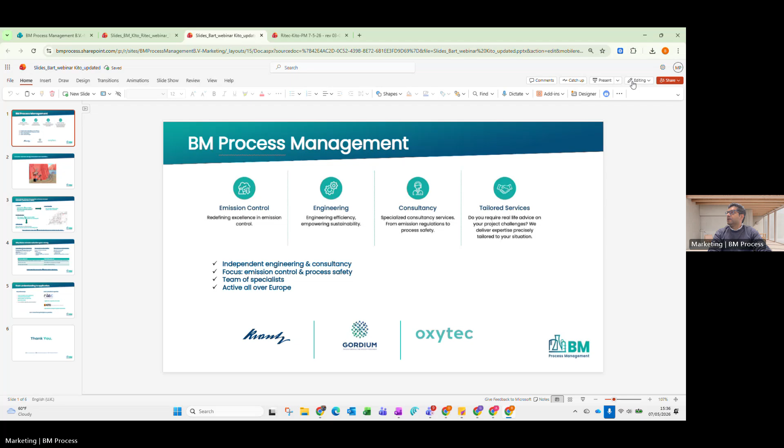Okay, thank you. Hi there, I'm Bart. Good afternoon, everyone, and thank you for joining. I'm happy to see the answers in the first quiz, that's actually good news, I think. For those of you who don't know us yet, we are an expert group. We handle general process, but we have a strong emphasis on off-gas treatment and the handling of explosive gases, and we are active throughout the entire EU.

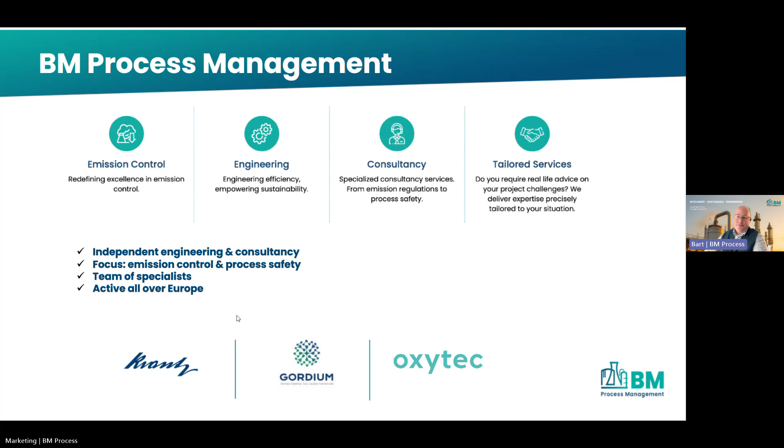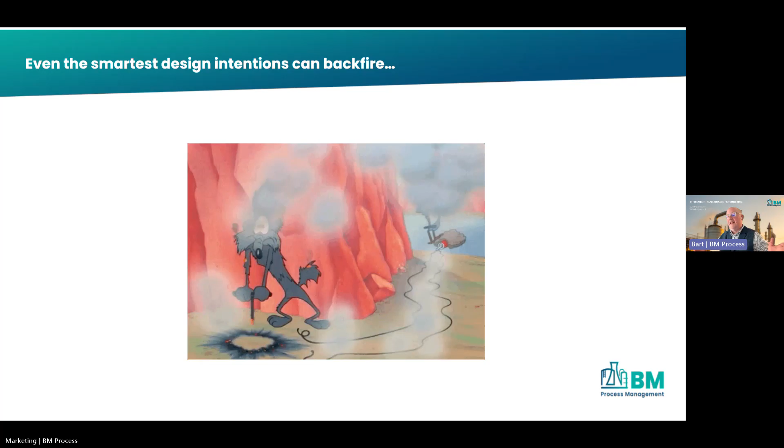So I'm pretty sure that you all know this guy. When I was a small kid, I really loved this, and to be honest, I still do. He always makes very smart plans, but in real life, it doesn't turn out as he expected. And that's the same in actual process design, because in real life, it can often lead to real life events that don't go as you planned or designed for.

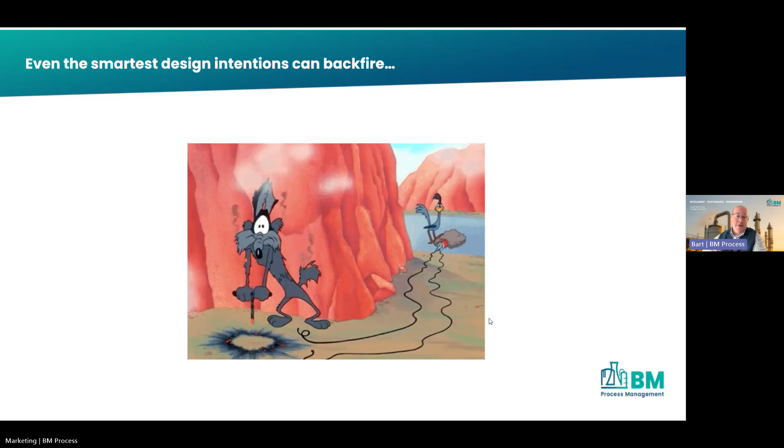So that's why I would like to start with an example from our day-to-day work that shows how we hopefully prevented such a thing from happening.

So let's go back to 2025, a client in Rotterdam. You see here 4 key steps that I wrote down. This client wanted to store a new product. Previously, the products he stored were in gas group 2A, and the new product fell into gas group 2B3. That required a complete review of the whole explosion protection and therefore, of course, also of the flame arrestors. By the way, previously they used inline flame arrestors underneath the breather valves, which in itself is not exactly optimal because there you can't really see what's happening.

You don't know if they're blocked. Problematic. But also, we changed the whole tank protection because we also moved into a plant where we would actively extract the off gas. So that actually required that we also review all of the breather valves, the pressures, and this and that. So based on that, we plan to install a breather valve for the day-to-day breathing, not for the overpressure protection, because the outlet of the off-gas was handled by the off-gas treatment. And of course, we also need to breathe in air when you need to.

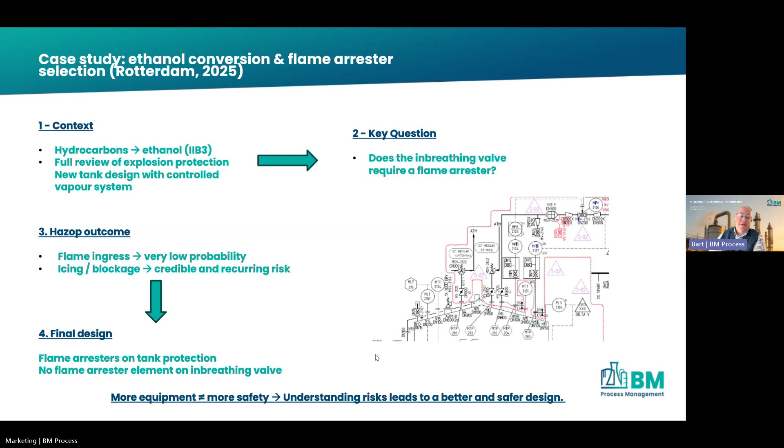So why does this go wrong? I split it up into three main groups. First of all, we see that we tend to properly assume and not go actually in depth. The other point is that we look at equipment, but not at the whole process. And the last one, I think that is even more happening in real life.

Is that we all, at least me myself, are pretty much risk averse. So we want to ensure that we avoid risk, where it might be smarter to see, okay, but what would be the right idea to do here? Because we always want to go for more is also more safe. But there you could ignore, for example, pressure drop, the fact that it can freeze over.

And what we also, at least me, see very often in practice is that flame arrestors have been placed, but you can't reach the bloody thing if you want to have work done on it. So there's also a part on where do I actually place it so I can do what is actually needed. So if you have a clear view of the whole process, that will lead to the fact that you do better in the entire process design.

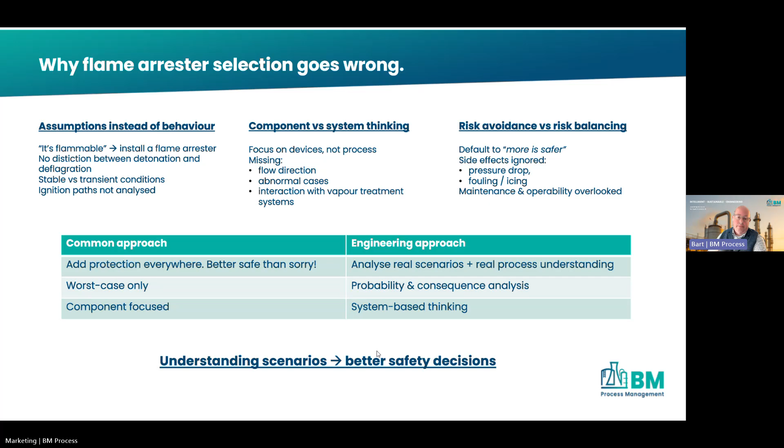So that brings me to what is the goal of today. We talked about three parts, and I added one more: use actual expertise when you really need it. We have a lot of it, me and my team, but if we don't know, we call the experts. That's why I'm happy with the guests we have today, because in past projects they've really helped us out. And in the end, that is the goal: we want to help the client.

That's why I would like to go into a deep dive on how to do all of this in practice and how this equipment actually works. So I will talk to you again in the Q&A at the end, and Amol, back to you.

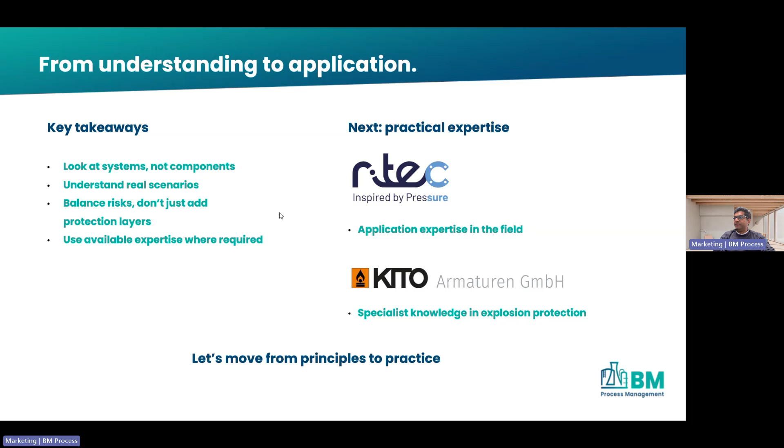Thank you, Bart. Good intro and sharing some practical and real life examples. As you said, let's move from principle to practice. So in a couple of seconds, I would like to get our...

Oops, sometimes it's a different story. Okay, let me see, present.

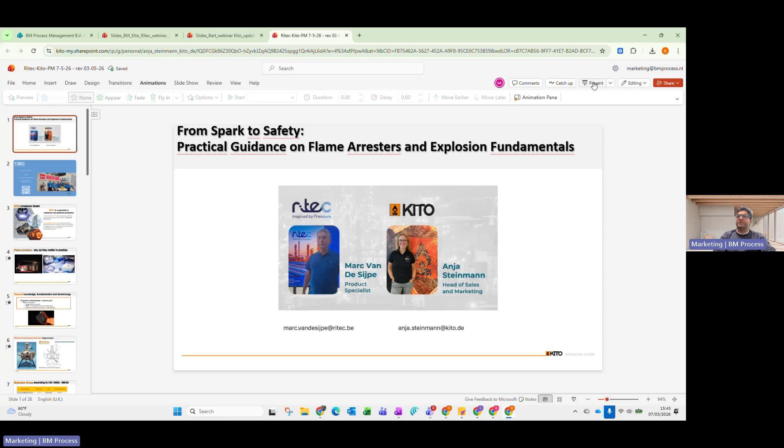All right, so I would like to invite on the screen our two guests and experts with whom BM Process Management has worked successfully. So, Anja and Marc, welcome.

Thank you. Welcome, and thank you for your introduction, Amel and Bart. We are happy to be here. Over to you. Okay.

Hello, I am Marc Van de Sijpe from the company Ritec. We are near Ghent in Belgium, and our CEO Rick van der Bussen started the company in 1996, so we are existing 30 years. I'm almost 25 years at Ritec. We started with rupture discs of BS&B, which you can see here, still our biggest supplier.

But 10 years ago, we started to distribute KITO GmbH in Belgium and Luxembourg, so I'm very pleased with the collaboration. And then finally, when our colleagues in the Netherlands in Emmeloord stopped their business, the company Truevals, now for 1 year we are also distributing KITO in the Netherlands.

Over to you, Anja. Thank you. My name is Anja. I'm at KITO now for about 15 years, but worked before at another company also producing flame arresters, so I'm in this field quite a long time. KITO is a mid-sized company based in Braunschweig, in the north of Germany.

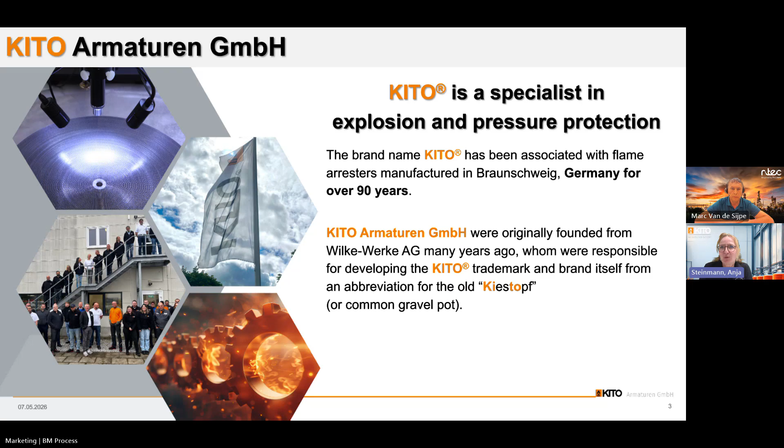So nowadays, Bart already mentioned why to install a flame arrestor or a breather valve, and we would like to show you some examples on the next slide explaining where to use them.

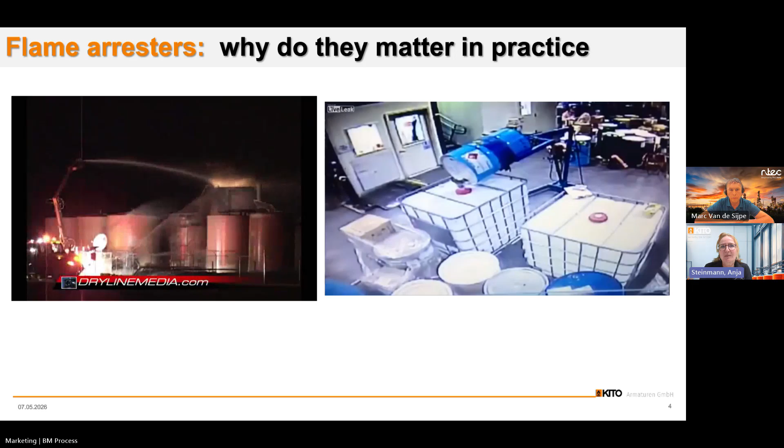So if we start with the left movie, we see that already a severe incident is happening. One tank is already affected, and although the fire brigade is doing the best, the tanks nearby are also affected, and everybody can see what happens if something is happening to one tank, and it is not a standalone installation.

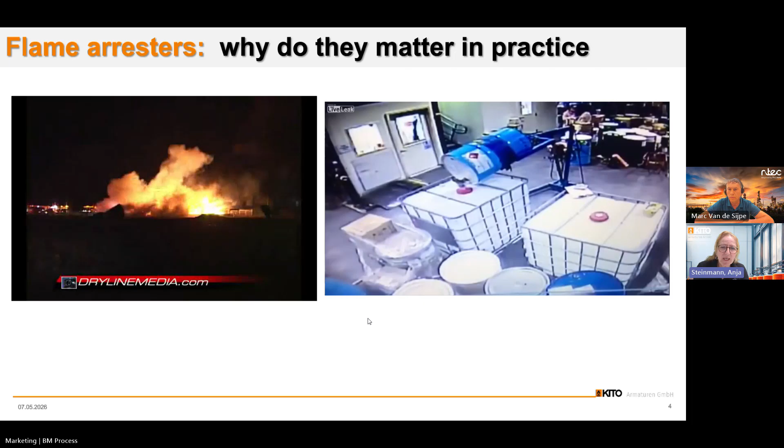So it will be very clear that that is severe. On the right movie, we have a completely different source of ignition. You see a man coming, wiping with a tissue, and he's creating a spark due to electrostatic electricity, and that can already be enough to ignite the atmosphere around the tank. So just two short examples of what can happen even if it's not very clear that there is a risk.

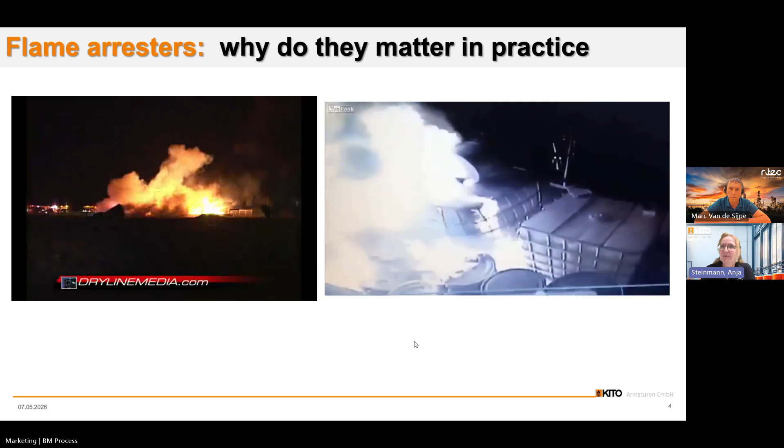So we would like to give you some more information about the world of explosion protection by flame arresters. Anja, when we have to deal with an explosive atmosphere and we as an owner cannot avoid that atmosphere, what shall we do? That's a very good question. Of course, the first aim is to avoid the explosive atmosphere, as Marc said.

We always need three things: a flammable product, an ignition source, and oxygen. If we can be sure that one of these elements is missing, we are on the safe side. But often that's not the case in reality, sometimes even only in startup or shutdown processes. So when we need a flame arrestor, that's a big field, so what do we need to know?

There are different designs of flame arresters, end of line, inline, so we need to know the application. And we want to have a deeper look at this famous MESG, maximum experimental safe gap, because that gives us an idea how dangerous the product is.

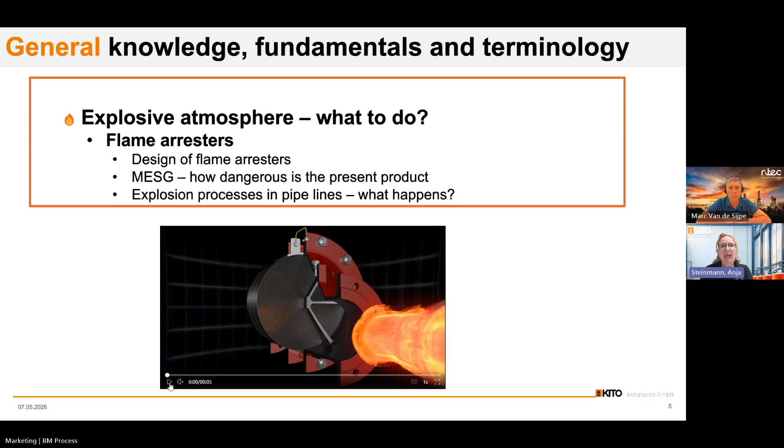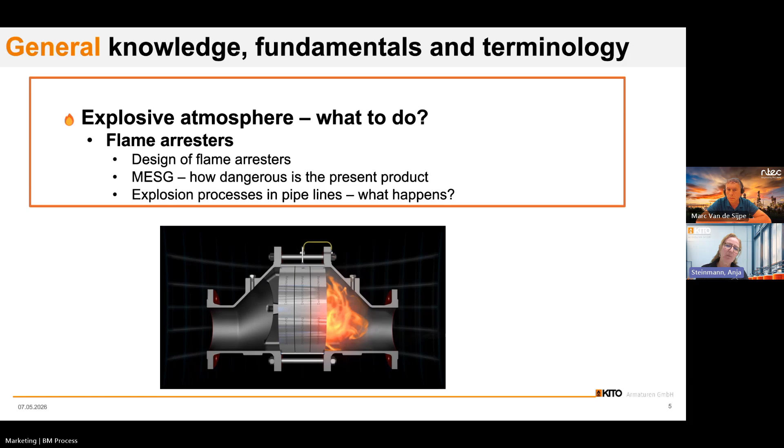As shown on the video below, thank you for starting that, Amol, we see how the flame arrestor in pipes is working. We see the flow coming from the side. Maybe we can see it again. And in the flame arrestor element itself, the flame is quenched. So a flame arrestor stops the propagation of an explosion from one part of the installation to another part.

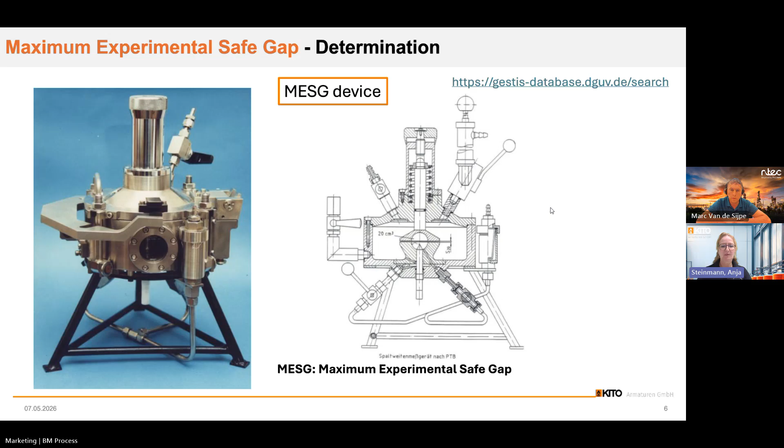So important to know: MESG, maximum experimental safe gap, is a very important parameter for a flammable product. Next slide, please.

Here you see the groups. The governing organizations have divided the various gases into groups from 2A1, the least dangerous gases, burning slowly like methane or biogas, up to 2C, which are violently burning gases like hydrogen. That's because it makes no sense to design a flame arrestor for each gas. It would be unworkable. So by dividing into groups, manufacturers can create a flame arrestor, for instance, suitable for 2B3.

This flame arrestor will stop all the gases from 2B3 and the underlying groups from 2A1 up to 2B3. There aren't so many gases in groups 2B and 2C, so if you are designing a multi-purpose tank for a tank farm, it could save money and pressure drop if you select, for instance, 2B3, because it will cover more than 90% of the gases.

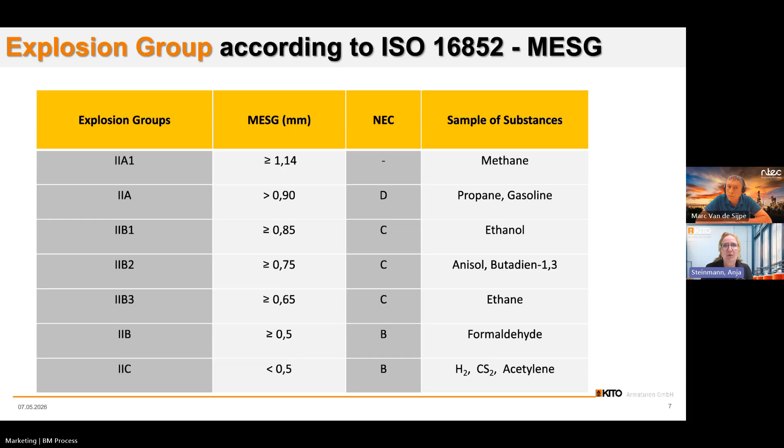And maybe just as an amendment, here we talk about these subgroups of group 2B, and those familiar with the electrical world know it's not quite the same there. In the electrical world, you see explosion group 2B and then a temperature class T. We sometimes see this in the data sheets we receive, but the electrical way of defining explosion groups is completely different than for flame arresters. So please, if you see something with T, that is not referring to the product in terms of explosion groups.

Next slide, please. I just want to invite you to have your own flame arrestor. If you can scan the QR code, you will get a grid. We can also share the link later in case you cannot do that with your mobile phone.

On the photo, you see the typical design of a flame arrestor element. We have this grid, the so-called crimped ribbon type. A flat ribbon and a crimped ribbon are wound together, and depending on the tooth wheel on the machine, we can create the specific width of gap, which is most important.

Here I want to point out that it is really important not to mix up the MESG, which we have heard before, and the width of gap, which is in the device. The MESG is measured under laboratory conditions, so we have a determined length of the gap, which can be completely different at the flame arrestor element of a device. Additionally, a flame arrestor can be used for different explosion processes, and therefore a different design of the flame arrestor element is necessary. So do not mix it up saying, oh, I have a 2B3 product, so automatically my width of gap needs to have the same value. That is not the case.

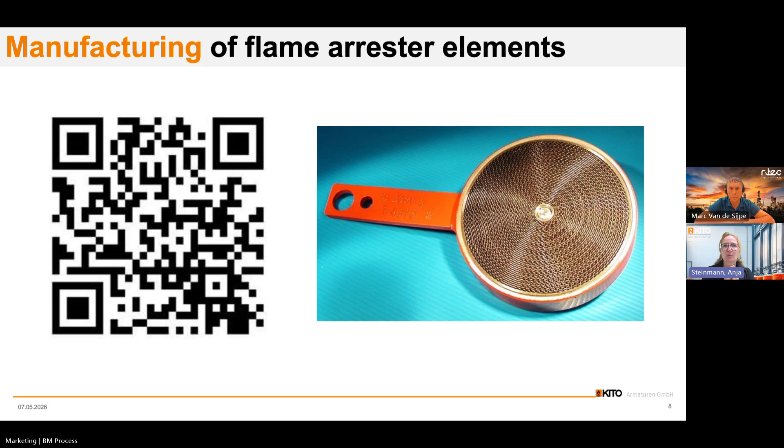For you it is important what is on the tag plate, what is on the certificate, on the declaration of conformity, for which explosion process and for which explosion group the flame arrestor is approved.

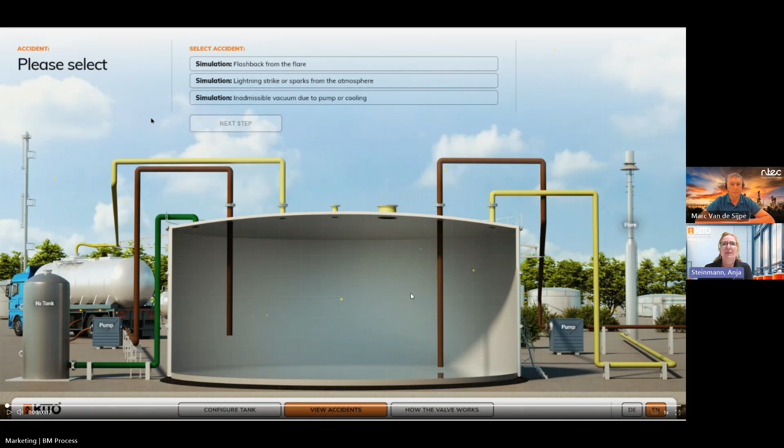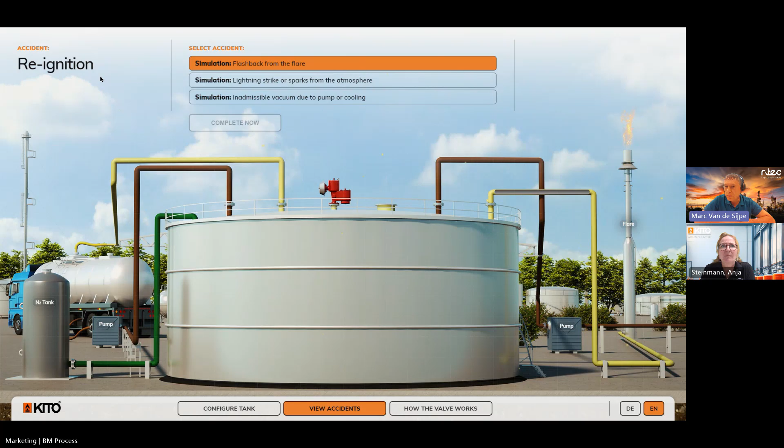Okay, so Marc, what are the risks? Here we see a thunderstorm approaching, and we will put a breather valve on top of the tank, but a valve without integrated flame arrestors. If you're lucky, the lightning will not pass, but if the valve is inbreathing or outbreathing... oh no, that was a flare system.

I think we need to go back one slide, huh? Yeah, thank you. No, one slide before. Okay. Yeah, and now start. Yeah, that's the flare, but no matter. You see the yellow pipe to the flare? It's correct, continue.

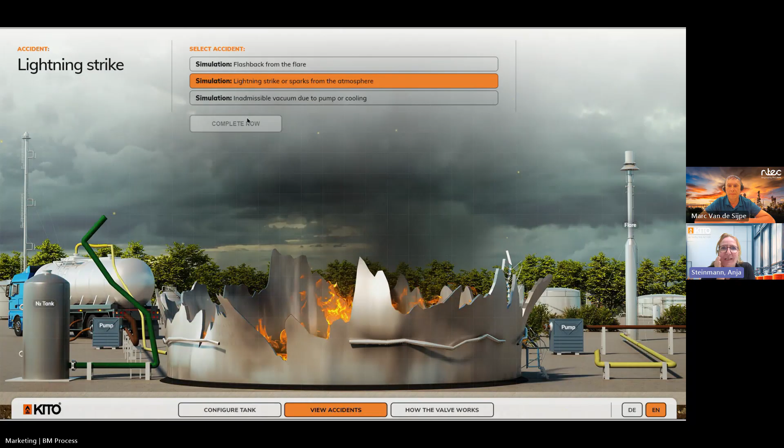Here is the lightning strike. Here is the valve, no flame arrestor. You're not lucky because it passes through. That is a bit what Bart had in the beginning. So if your tank is not protected, then it's a sunny day and in the evening it's getting cold, lightning from the thunderstorm, we will all not be happy. Okay, so now comes... no, that is again, that is the same.

Yeah, the lightning. So then next. Here we have the flashback from the flare. The yellow pipe is driving the gases through the flare, but the flare is burning continuously, so that's more dangerous than a lightning strike. And if you do not have a flame arrestor there, you can have a flashback from the flare and an ignition in the tank, which you see here.

Okay, so that was a very good example for an explosion process in a pipeline, which will bring us to the next slide, please.

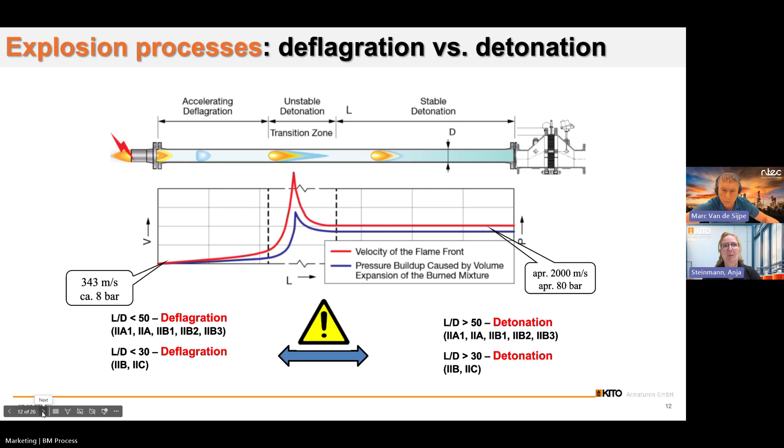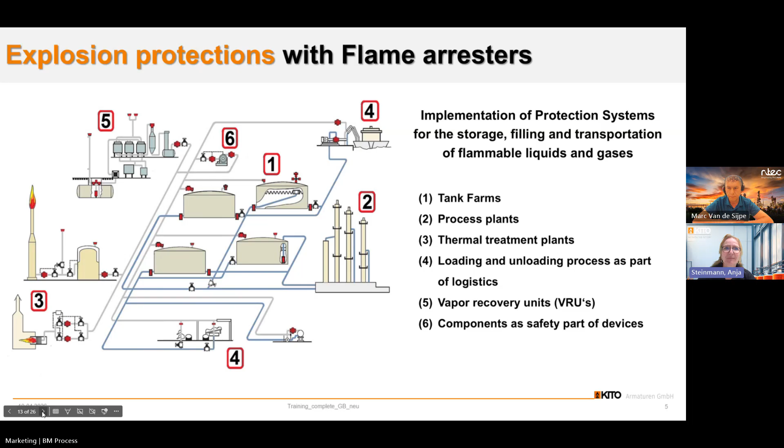Yeah, so in summary, Anja, which are actually the parameters that you really need to consider for a design of a flame arrestor? Yeah, that is the most important question. What do we need to know to give you the best possible support? Of course, we need to know which product are we speaking about.

Bart said in the beginning there was a change in product in the tank. That makes a big difference in the flame arrestors you may need in case the explosion group is changing. So first we need to know which product, then what is the explosion process which may occur - does it come from the atmosphere or does it come from a pipeline, as we learned before, deflagration or detonation?

Of course, the flame arrestor needs to be designed for the operational conditions, meaning it must be resistant against corrosion, temperature, and special specifications need to be considered, and temperature and pressures need to be double checked. Flame arresters are in general approved for atmospheric conditions. They are defined up to 60 degrees Celsius and 1.1 bar absolute. But there are as well devices which are approved for higher pressures and temperatures, but that must be known.

And of course, for the operator, it's very important, especially for inline arresters, that the pressure drop they are causing is not too high, to let the system run best.

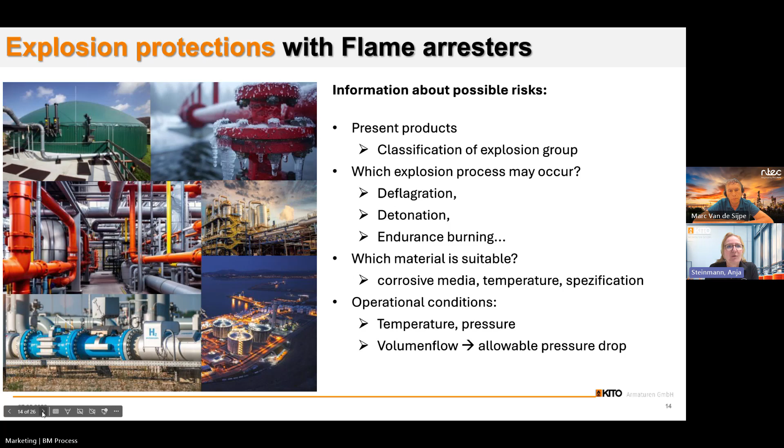All right, then we come to the next slide, and it's quiz time again.

Okay, I think that is hopefully now an easy question. What's the difference between deflagration and detonation? A deflagration propagates slower than the speed of sound, a detonation faster. A deflagration occurs only underwater, a detonation only in air. A deflagration requires no fuel, a detonation does. So please, your votes.

Okay, yeah, of course, what we have learned - both are explosion processes in pipes, and a detonation has higher pressures and higher velocities. All right, and we go to the next slide.

Yeah, we want to point out one document which can be really interesting - it's the CEN guide, a guideline for flame arresters. So it is not really a law, but it gives really helpful information such as definitions and as well installation limits. Marc, what we are facing often is this question about nominal pipe sizes connected to flame arresters.

Yes, and that's an important one because sometimes it appears only late in the stage after the flame arrestor has been ordered, because we do not have the full picture. But the issue is that flame arresters are certified by notified bodies under certain conditions, and one of the conditions is that the nominal size of the pipeline at the side where the ignition is, called the unprotected side, shall be either equal or less. And sometimes we see that this is not the real situation, that there is a reduction.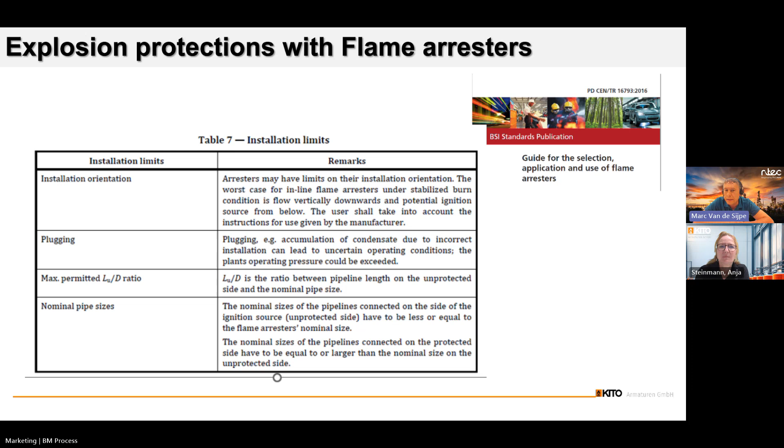As you can see in the next slide, we were working on a project, and we had already defined the flame arresters, but our customer needed step files and then sent a nice picture of the complete installation. And all of a sudden we discovered the central zone has a reduction.

The flame is coming from below and a DN150 pipe, but some measurement equipment in the middle has a DN100. Then we go back to DN150 to the detonation arrestor on top. The reduction from DN150 to DN100 can cause unstable behavior, and the flame arrestor could therefore not be able to stop the flame because it has been tested and certified as if it were a DN150 pipe without restrictions. The smaller size leads to an increase in pressure and velocity.

So the explosion process behavior is changed. As you see on the right photo, that is a really big mistake. So please always be aware. Maybe you can ask for the IOM before, or ask the manufacturer, or as we were lucky to get here, the installation which was planned, so we could give advice before it was too late.

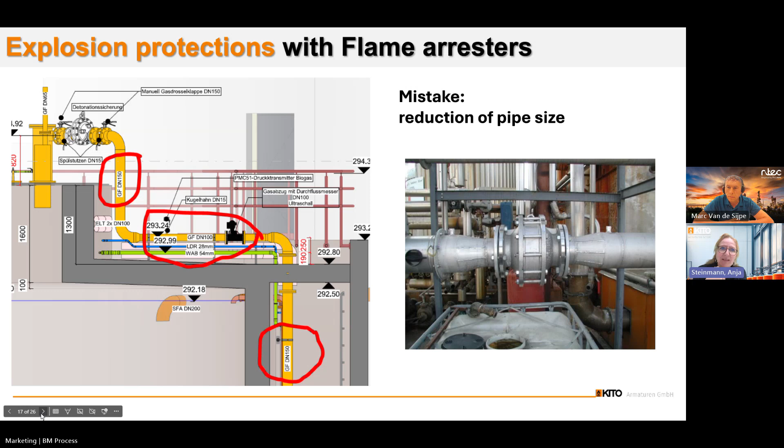Next slide, please. Yeah. Anja, I have a question.

Which one of these two do you think is the best solution? Yeah, that's a nice question. The left side has a lot of advantages. On the right side, for explanation, we see two devices connected and installed: an inline flame arrestor and an end-of-line breather valve. There are several disadvantages of the right-hand side. Of course, an inline flame arrestor is heavier and has a stronger flame arrestor element. The risk of clogging is higher as it is inline installed, and maintenance, what Bart also mentioned in the beginning, is more difficult.

But the main point is that the behavior of an inline flame arrestor connected to an end-of-line valve will be different, because as Marc said, it is tested in a different way. Nowadays, the valid international standard requires that both devices are tested together as a unit, and that is often not the case in what we see in the field. That's often an American way of thinking, installing an inline arrestor and end-of-line breather valve separately. Whereas on the left-hand side, you have a combined unit, combining both functions, safety against explosion and in-and-out breathing, in one device. So costs might be lower, and weight is lower, which is often important on a tank.

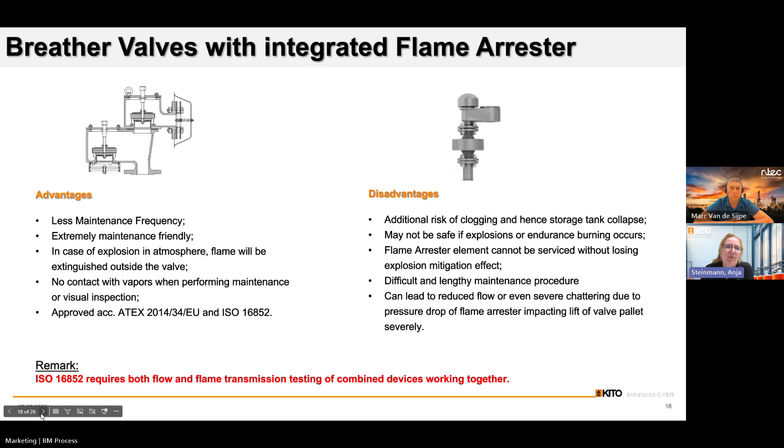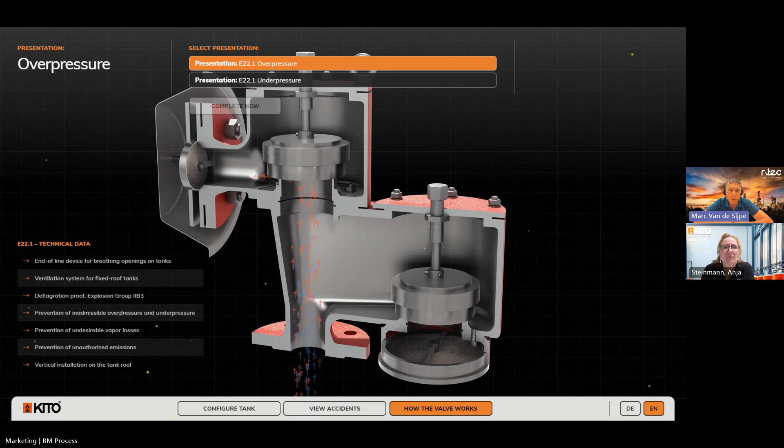Here we can see quickly the overpressure event of such a valve. The tank is on the bottom, and on top is the overpressure pallet. So the tank vapors push the pallet up and they can escape to the left. If there is an ignition from a lightning strike, it tries to get in from the left to the right, but the flame arrestor there will stop it.

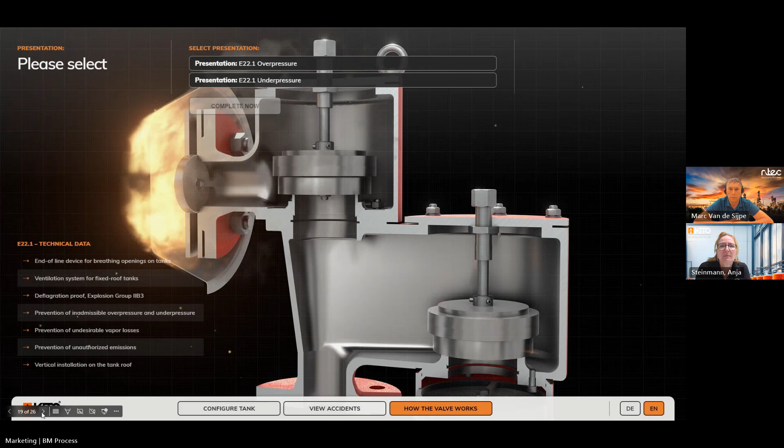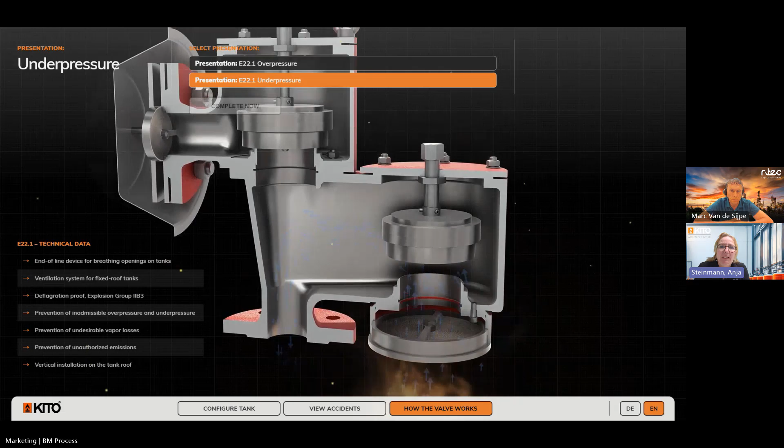And on the next slide, we will see the vacuum side. Here it's a bit the same: the air is sucked from the outside, air can breathe in, and in case of an ignition, flames are stopped at the flame arrestor element. So it's an easy unit giving you both functions: safety, and in-and-out breathing.

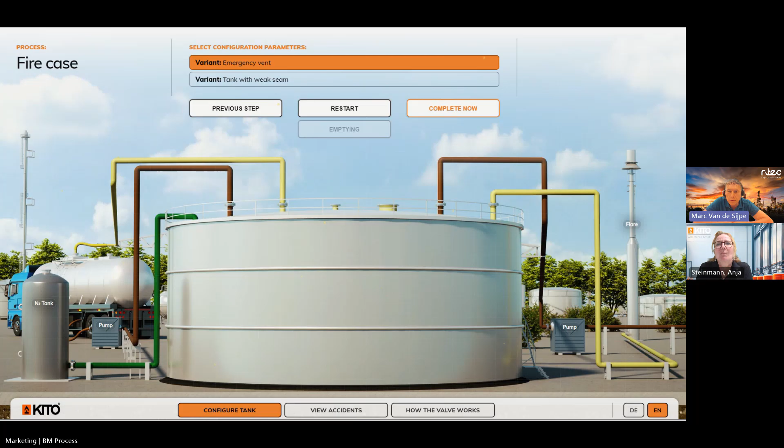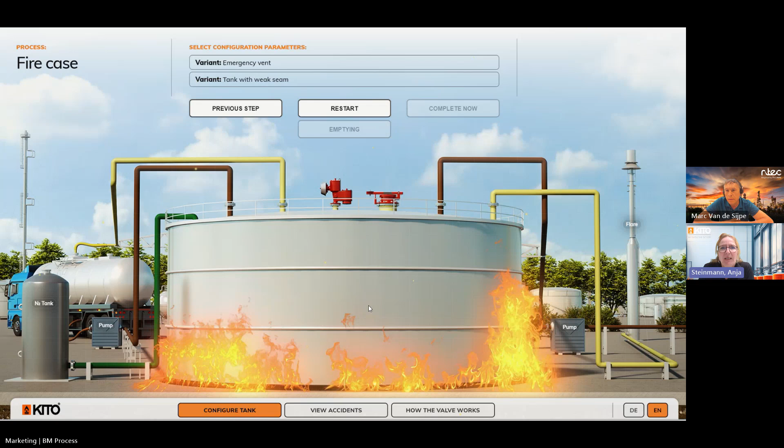Which brings us to another risk on the next slide. So what do we have here? Fire, an external pool fire. So there is a spilled product outside of the tank that catches fire, and you need to protect the tank because a lot of energy will go into the tank, creating a lot of vapor. There you have the typical emergency vent, which will open and relieve a huge amount of vapors.

On the next slide, we can talk a bit about when do we use an emergency vent. Just a short difference between DIN tanks, as we are more familiar with in Germany, and API tanks. DIN tanks are designed with a weak seam, meaning in case of fire, it is foreseen that the seam between the shell and the roof will break, and like an oyster it will open, and there the big volume flow will escape. But API tanks are designed differently, and for those, an emergency vent is the standard unit.

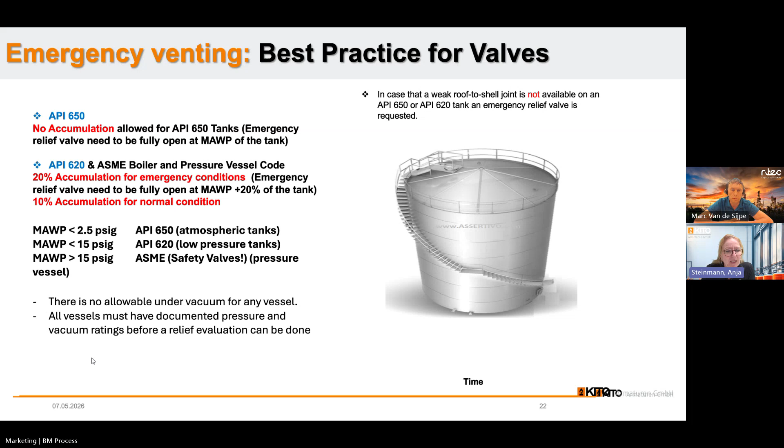Just a word about two very common standards, API 650 and API 620, because the difference is in how you set your emergency vent. Only one, API 620, allows you to go higher than the maximum allowable working pressure once the emergency vent is opening. Every valve works with a certain accumulation, and API 620 allows you to go 20% above. Whereas in API 650, you need to be sure that when the emergency vent is opening, it is fully open at the maximum allowable working pressure of the tank. That is an interesting point when it comes to the settings of valves, which we will see on the next slide.

Yeah, exactly. Every manufacturer will give you detailed information about the accumulation. That means how much percentage does the valve need to be fully open. But of course, it also needs a certain blowdown, as Marc said, when it's reseating.

Those who are working with real safety valves at higher pressures will be familiar with that. And the same is for weight-loaded, low-pressure valves. So always be sure that you have a certain gap between the opening points of your valves in case you have several installed on a tank.

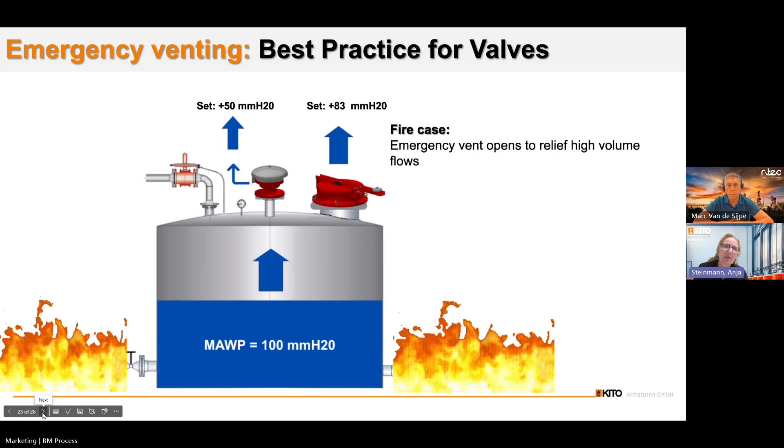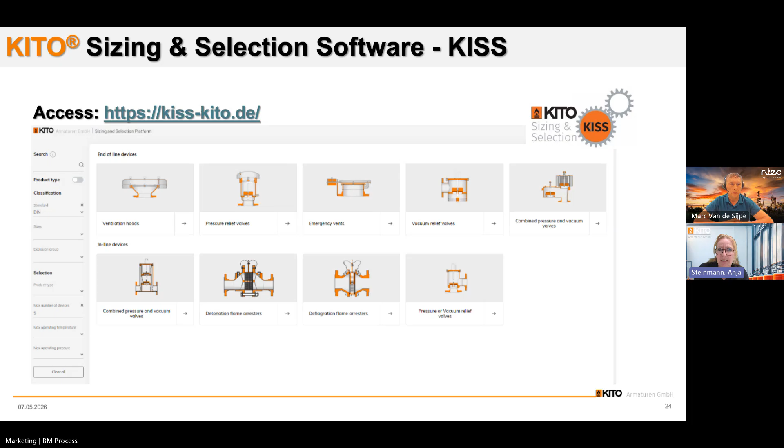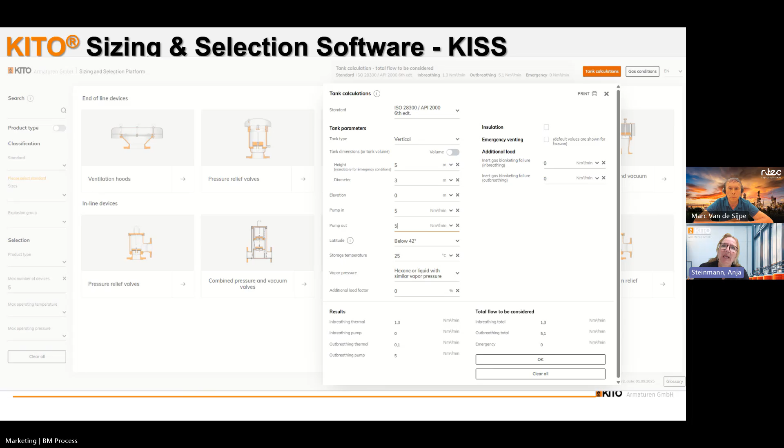So you can choose which standard you want to use. There are several, ISO 28300 or API 2000 in other editions, and you can enter your tank data here, like height, diameter, where it is installed in the world, pump rates, and automatically you will get the results.

In this case, we also choose emergency venting, and you see on the top line the results are shown. You can choose emergency vent in this case, enter the tank design pressure, then it automatically selects the set pressure and the size.

If you want, you can add a tag number and export a PDF file for your own documentation. Nothing is stored on the website, so just feel free to have a look at that, and it's quite useful for doing a first calculation.

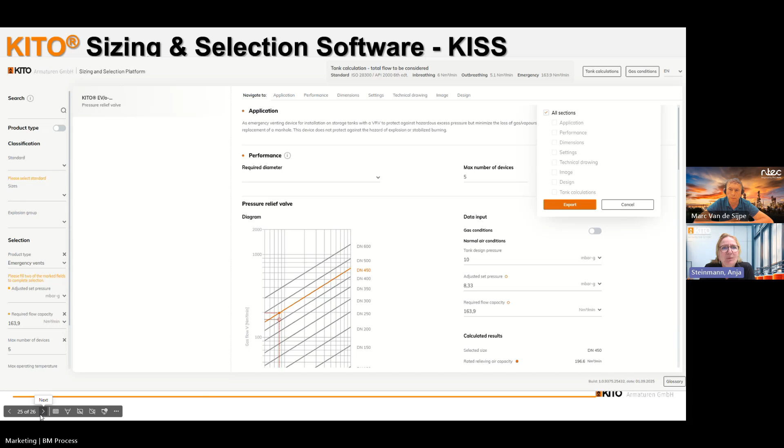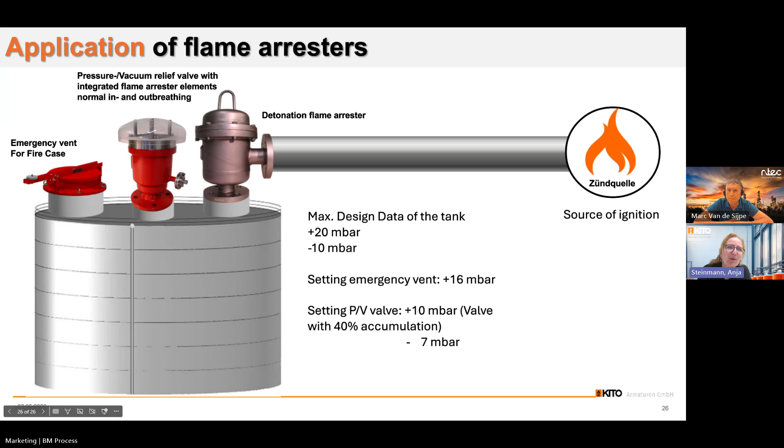Yeah, that was our short introduction in our field of explosion protection and the world of breather valves, which we like quite a lot, Marc. Huh? Yes, Anja.